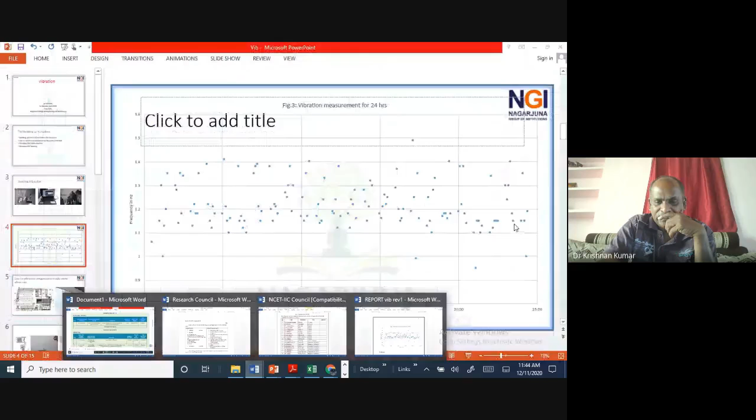So with this analysis, we gave the report to the concerned company people, those sitting in the US, and our report was very well taken. Finally they got clearance - nothing to worry about. So I'll be showing some reports on that.

Yeah, these are the reports. I don't want to show exactly whom we have done this for. These are the orders.

So what measurement methods did we use? We used a triaxial accelerometer affixed on the floor. The signals were captured on 3 axes using the NI-MyRio. LabVIEW 2017 was used for coding, for capturing the signal and for the analysis.

The captured signals were analyzed by FFT and the frequency was recorded. The recorded frequency in different spans were presented, and finally the 24-hour analysis report has been submitted. So here you are seeing our photographs.

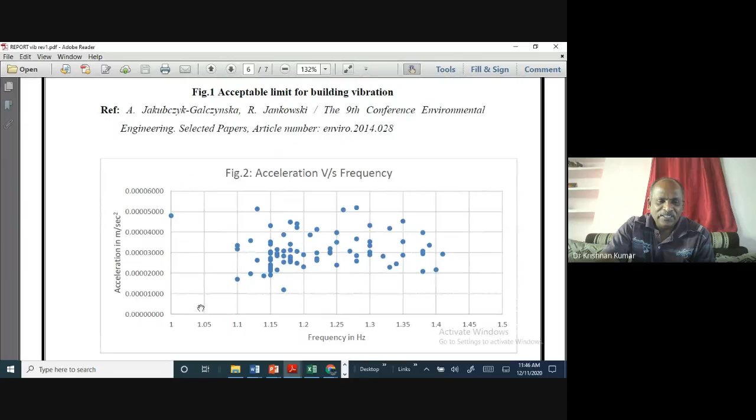This is within the limit. That is within the limit. You can see here, this is the one.

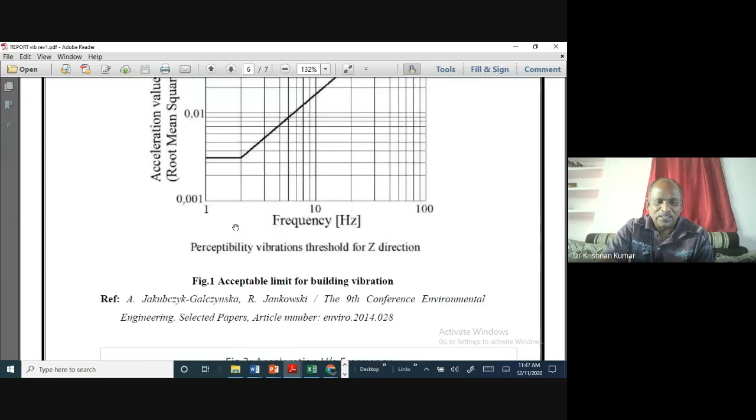0.00 and below, it is in the horizontal mode. Whatever frequency we have got is in horizontal mode. You can see that frequency also, between 1 and 2, is the horizontal mode. Right, this is horizontal mode.

So our frequency is also maximum 1 to 2. So whatever we have got is in horizontal mode, and this also satisfies - the frequency shall be greater than 1. Then acceleration also we have got this.

Next, the vibration measurement, the frequency with respect to time is measured, and this also proves that the frequency is greater than 1, and also all along it is uniform. So need not worry about it.

So 24 hours why we took is, suppose if any ramming is happening in between, that vibration may affect the building during that time - if any peaks are observed or not. For that purpose, we measured for 24 hours. But across all 24 hours, we come to understand that it may not be much of a problem.

And finally, we concluded and submitted the report. So that has shown that we can really do vibration analysis for any structures, buildings and machines. This is the one we have done for one particular tall building.

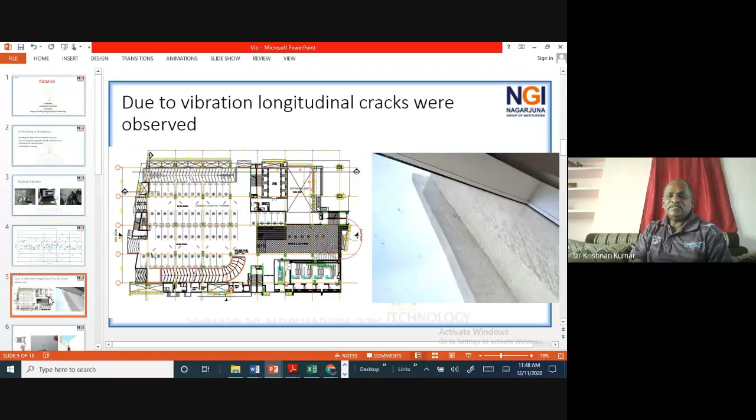Next one. There is a building that, due to vibration, has its face wall almost cracked and on the verge of collapsing.

This is also a very tall building, around 22 floors. You are seeing this is the face wall, and this is the perpendicular wall to which it is joined. Yeah, huge cracks from the bottom to top. We have seen the crack.

This is the plan of the portion. The encircled one is the face wall. The face wall is connected to the vertical wall, like that. And perpendicular to that they have the wall, and it is constructed like that.

Now that also was addressed to us, and we used vibration analysis. After that we found the cause of the cracking and we gave remedial measures, everything about what to do, and they have rehabilitated it. Now there is no problem of vibration over there.

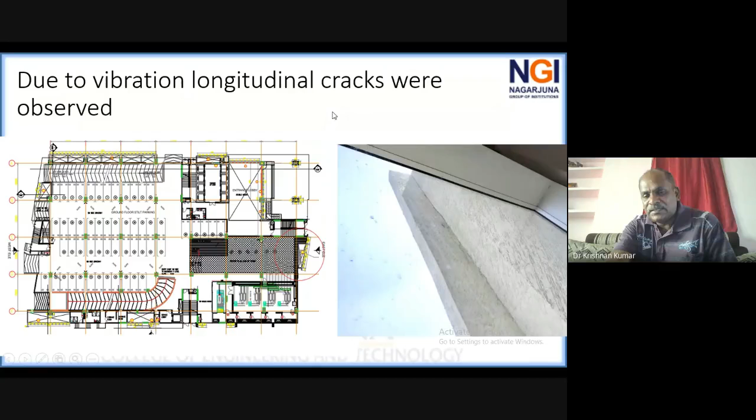You see the close-up view, this is the plan we have made. Location 1 and location 2. Location 2 is on the opposite side, this is location 1. We have a direct diagonal, and we have a vertical wall as well as the horizontal wall. So this is the close-up view.

The bottommost has got less crack, and as it goes up, you see that even a 3 centimeter crack width happened, because it is acting like a cantilever, and because of the vibration, this has got this kind of thing. Then what is the solution?

So we made measurements all along both walls here and here. Parallel to that, we placed the accelerometer at every 1 meter interval, and simultaneously with both accelerometers we measured the acceleration, that means the voltage response with respect to time.

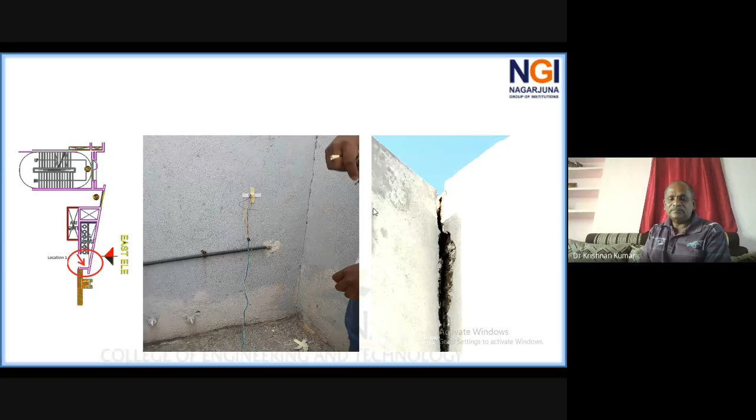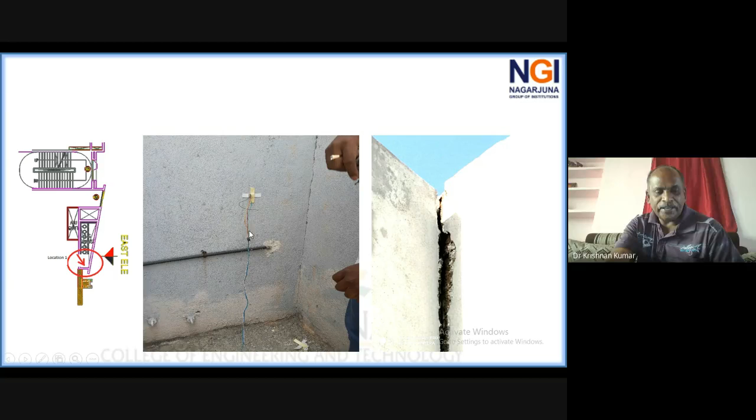After that, that is converted into FFT analysis. Through that we found what are the frequencies. Okay, this is the way we have done that job.

Okay, now how did we solve the same thing, and what method of measurements did we make? We used the triaxial accelerometer and affixed it on both the concrete walls at location 1 and location 2, and acceleration was measured with respect to the DG set on and off.

On the top floor, there were other machineries, the cooling machineries. For example, the entire building is air conditioned, so there will be motors used for cooling, that is compressors and so on. Also the water pump, the water tank is there, the water pumps and all, placed on the terrace.

From the well, it is taken up and distributed through pressure. That too is laid on the top floor. So we used triaxial accelerometers there on both the parallel walls. We kept it there, and this is the way we made it.

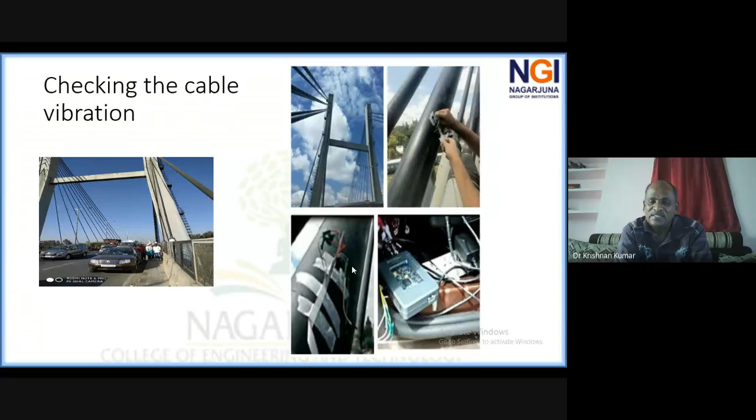My team students are there doing the work. On the right side you can see the accelerometers are properly affixed, and connected to myRIO, which was set up in my car's dickey. From that, we had UPS and everything set up, and we found the vibrations.

So the vibration analysis has been done there. You are seeing the bridge end, where the anchorage wires are ending, and the entire cable stay bridge rests on the bearing. This is the bearing, which I will explain to you later.

So in the bridges, these are the cable locations. This one is Bangalore side, another is Madras, that means Chennai road. This is the KR Puram road. So in the Bangalore side and Madras side, these are the cables. It starts from A, B, C, D, E, F, G, H, and M, N.

Finally, at the end, we have another 6 cables. So 4 plus 6, 10, the same way 4 plus 6, 10. Both sides 10, 10 cables. But only thing, the span is different. For example, first 4 cables, the same span. And it is made some eccentric, and they equalized with additional cables over there.

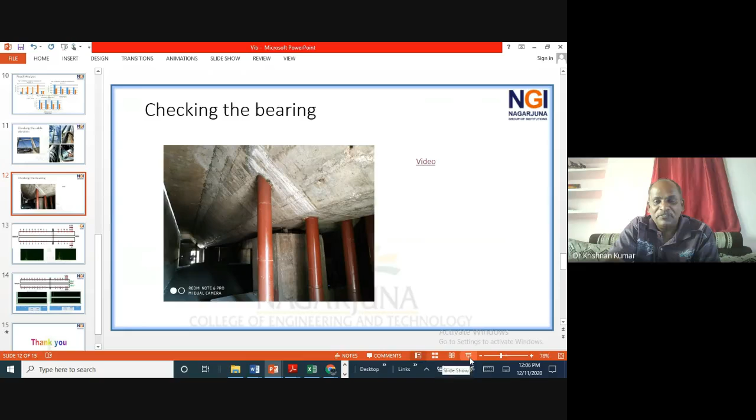So now, here are the bearings. This is bearing number 1 and bearing number 2. We have tested both the bearings. Before that, I'm giving you a small video. You can just observe that video. This is our team and our faculty members, exactly on the bearing.

Again, we have used the myRIO and LabVIEW 2017. The accelerometer is connected on the bearing. The bearing has two parts, lower part and upper part. The upper part is from the girder: the upper plate and lower plate. So the bearing is a movable one.

So here we have to make the vibration measurements both at the bottom as well as the top. That we have done. If the bearing is in good condition, both the vibrations will be almost the same. If the vibration movements are slightly different, it is also okay. But if the bearing is not good, there will be a difference of vibrations we can observe.

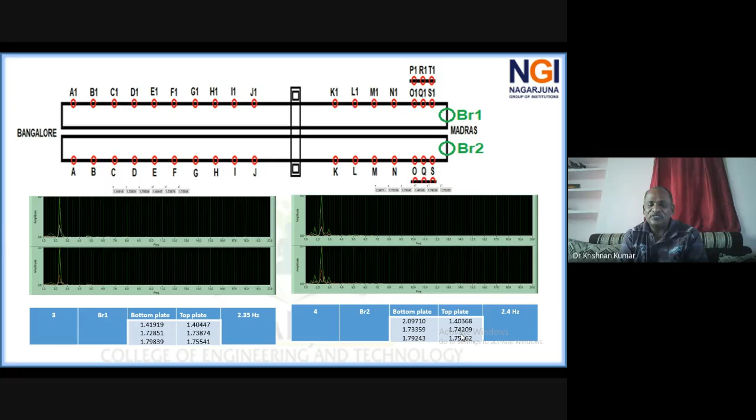So that also we have mentioned in the report, and we have given the report to the Southwestern Railway, and correspondingly they have worked out how to rectify it: we have to remove the bearing, clean it, properly lubricate it, and fit it again. That is the bearing maintenance they have to do. They have done that. Now it is working good.

So I want to show the reports. Just wait, please. Oh, sorry. I have given it in railways. I will show that report. It will be useful. That is in railway.

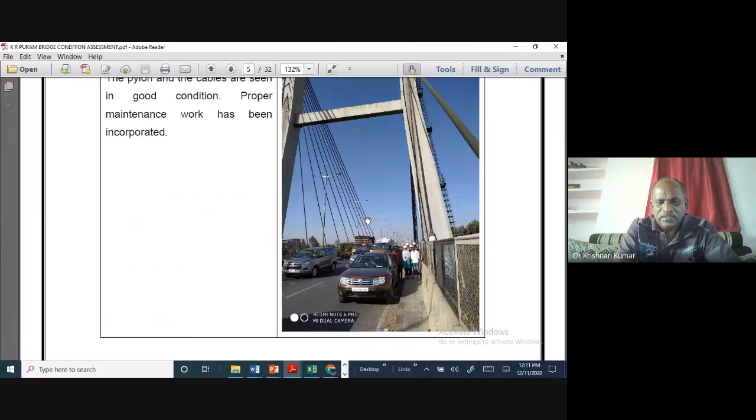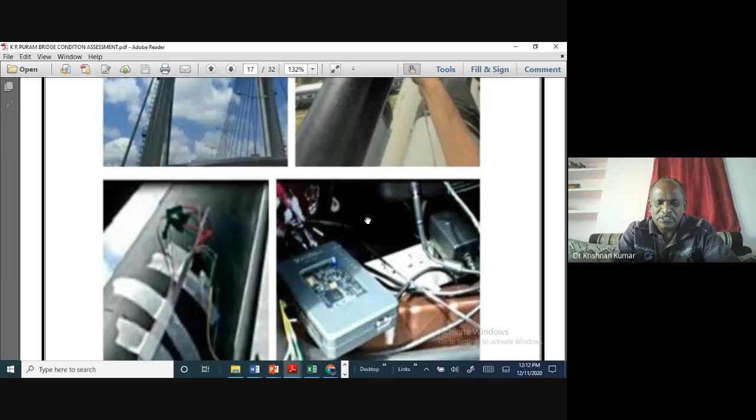So this is the condition assessment of the cable-stayed bridge which we have done, in March 2019. These are the letters they have given. This is our team. And these are the components at different locations. The vibrational analysis which we have done, these are the vibration measurements. That is the close-up view.

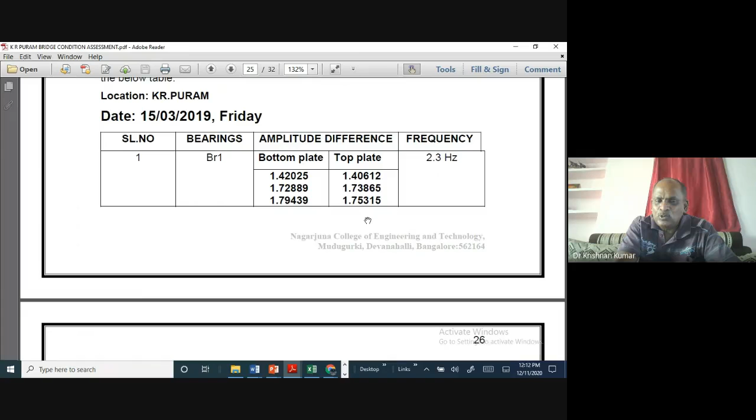And these are the different vibrations for all the cables. We have done FFT analysis. And the bearing also, these are the bearing readings. The frequency is 2.3, with different amplitudes. These are the frequencies we have given, and finally we have submitted this. This was very useful for them, and they now properly have the monitoring system.

They are frequently asking us to complete this work. This year, because of the pandemic, we are not able to go. Next year, 2021, we are planning to do the same kind of job. So then I will be giving you certain LabVIEW codings with regard to vibration.

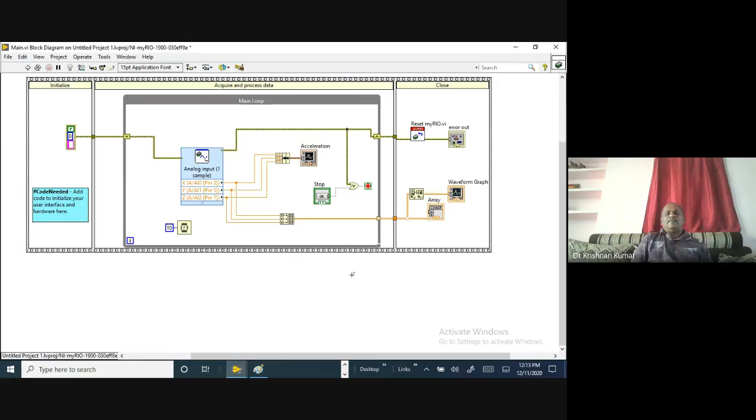You see that this is the vibration project. When you make a standalone system in real time to make a measurement, this is called a project. We have to create a project. This will be automatically created when you connect the myRIO with your system, and it will configure automatically. When you open the project, it will show the main VI. In that VI you have to do your coding for acquiring the signal as well as for further analysis.

So this is called a project. In any real-time work, we have to do it this way, in this project mode. Then after that, in the same main VI, for example, I'm just closing this. Here also I'm closing this. I wanted to open this main VI. Now I have got it.

You see that the project structure is like this. The state machine which we have seen is for different use, but the project is like a sequence structure. Inside you will be having a while loop. Initially the sequence structure is to initiate the error handling. Initially it is 0. Then we have used a shift register here.

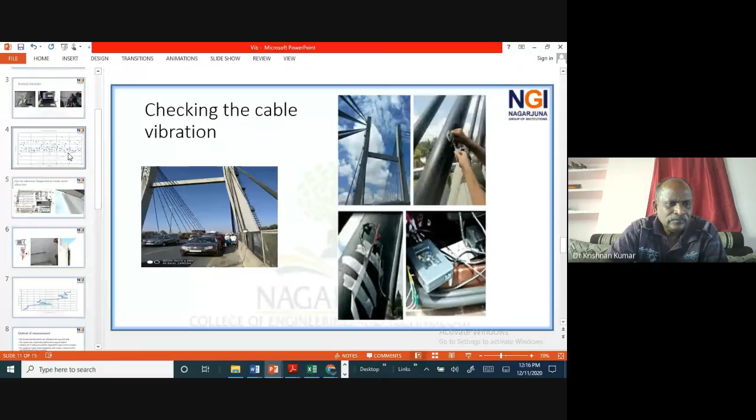You are seeing here the accelerometer is here, correct? In the accelerometer, on this side, is the general configuration of myRIO. So this is the data connection and power connection. And here, this is like a DAC, we can use it. And one more thing, we have input and output for voice recording. And on this side we have A and B, all channels we can use. So for A, analog input channels and analog output channels are available, and for B also we have analog input channel

and analog output channel. Right now, what we have done is for A, the A compartment, in which we have used the channels. So that is the one I told you there. Okay, so this comes under the A channel, AI0, AI1, AI2. So this is AI0, AI1, AI2. In LabVIEW it always starts from 0, not from 1. 1 means the second channel, 0 means the first channel. Like that it will be there. So here A compartment AI0, and A compartment AI1, AI2, like that. Okay, that is X, Y, Z.

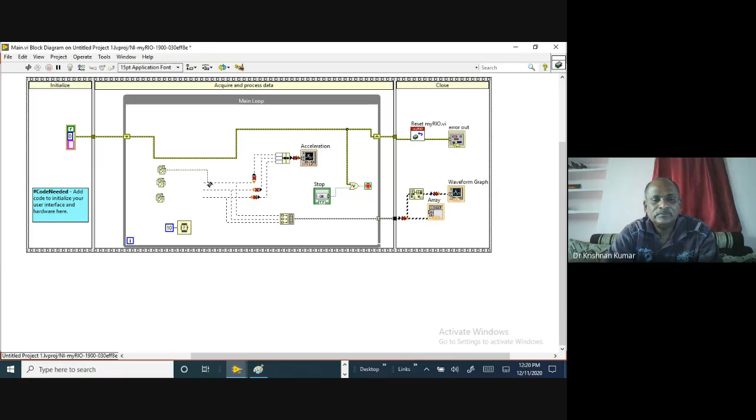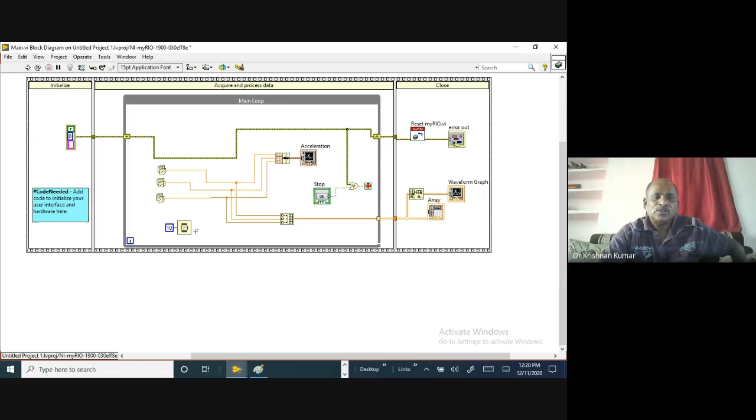So this is actually with the equipment. Now I am going to simulate for you. Okay, now I am taking it out. So I will be simulating. Okay, so what I am going to do, I will be giving you some random numbers. So these random numbers I am just connecting. So the wait time we have given is 10 milliseconds. Okay, 10 milliseconds we have given as the wait value. So now let us see how our simulated acceleration we are getting.

I'm sorry, the equipment should be there, then only it will be coming. But what I can do, I can directly make the same thing without the project. Okay. So I'm closing the project.

So I can use a sequence. So this is a sequence structure. Add frame after. Again I can add after. So this is the typical block diagram. Okay. So here we will be initiating and it will be closing. That will be there. And here what I can do, I have to use my while loop. So I am using my while loop here.

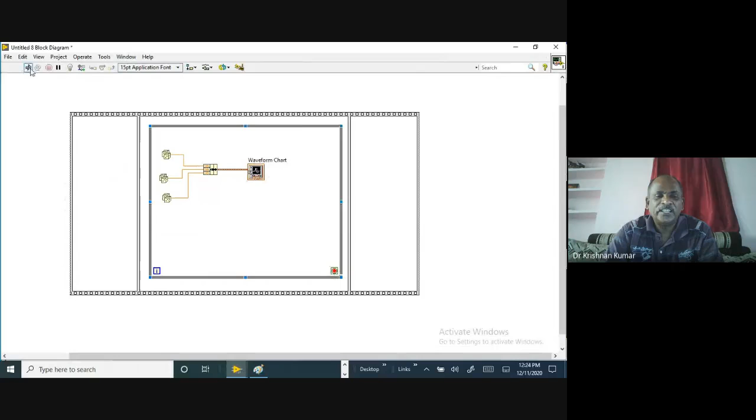So this is the one waveform chart. So I'm connecting to the waveform chart. So now it is still in gray color; your coding is not fulfilled. That means here we have to give a condition. So I am making a condition of stop button. Now it has become white.

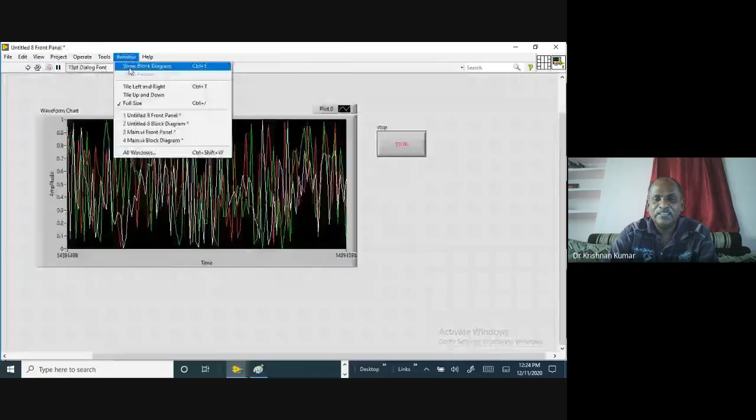Otherwise the while loop will continuously operate. Whenever we want, we have to turn it off. In an emergency you can also turn it off here, but I'm not doing that. So now I can run the system. Before that, I will stop. I wanted the wait time every 10 milliseconds. So I'll be giving every 10 milliseconds. So 10.

Now I will be getting, yeah. So you can see that the waveform is coming. The same way you will get the complete X, Y, Z direction accelerometer readings. After that, this reading can be utilized for making the analysis.

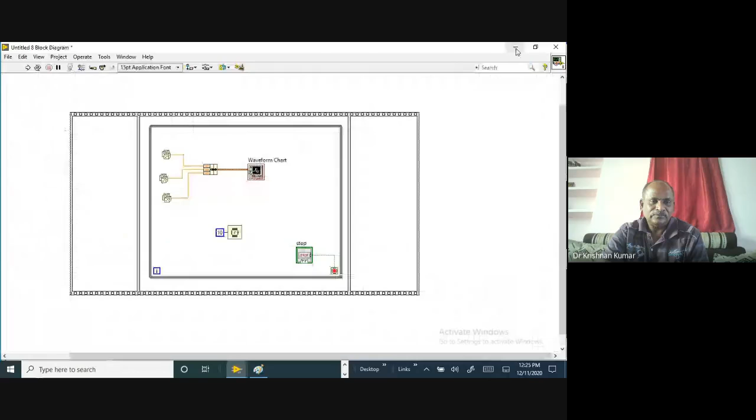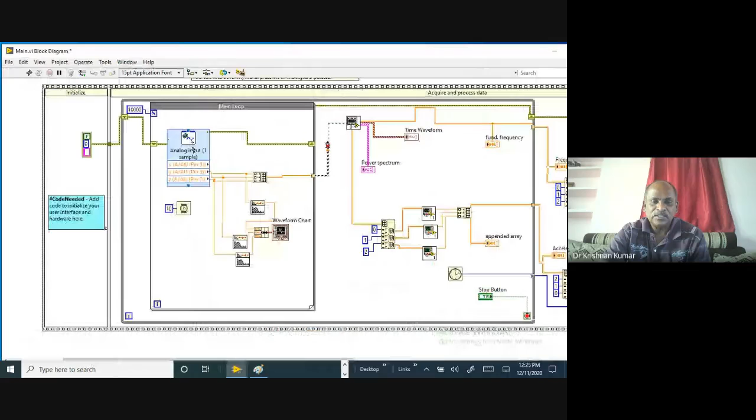So for that, I will be giving another VI. For example, this VI you are seeing here. So the same thing from the equipment, now it is filtered. Let's see which filter it comes under. This is an equiripple low pass filter, point by point. That will filter the noise and you will be getting only the signal. That signal you will be taking as the accelerometer reading.

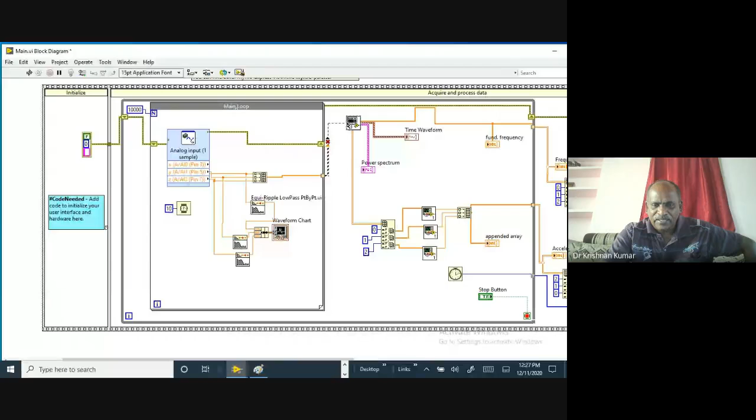See, for example, this is the file path which is connected there. This is the sub VI actually. So here is the sub VI. Correspondingly, whatever output is coming, it is coming to the file path. So now, for example, instead of the file path, I can directly give the value here. So this is this particular thing.

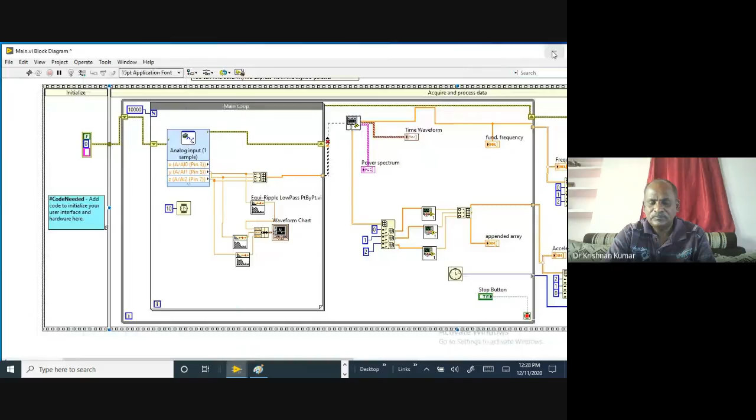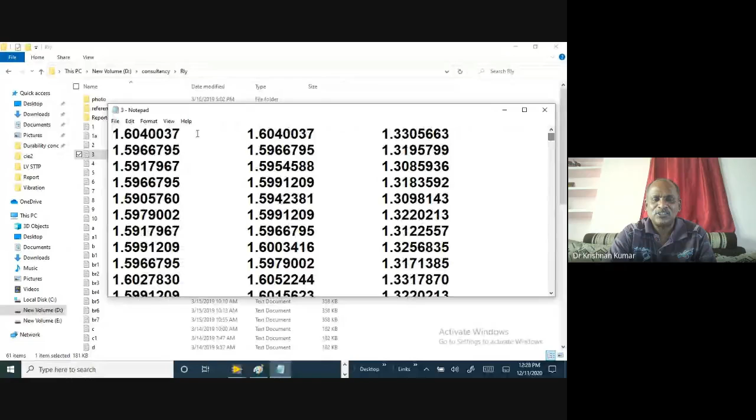Suppose you have an accelerometer reading; it will take up the data, and after that it is going to analyze. So in real time I will show you some of the data. In the cable bridge itself, we have got all the data. These are the cable numbers. For example, cable number 3. These are the accelerometer data, X, Y, Z, the 3 different accelerometer readings in terms of volts. This will be captured there.

So in that particular VI, I have to open it. For demo purposes I am opening it. But actually, if it is a sub VI, that will automatically be taken from the main VI. So now I want to use exactly the data from that railway consultancy. Suppose cable number 3 or 4, whatever it may be; let us take cable number 6. Now it is done. If you click the run button, then you will get it.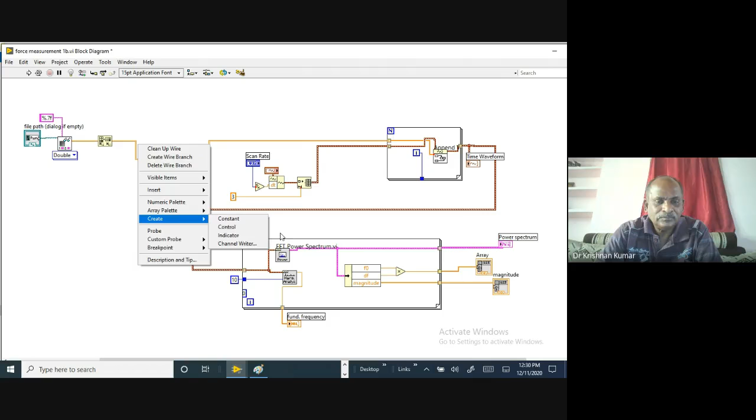I'm just checking here. I think data is not there in that particular one. I will go to another. 3.

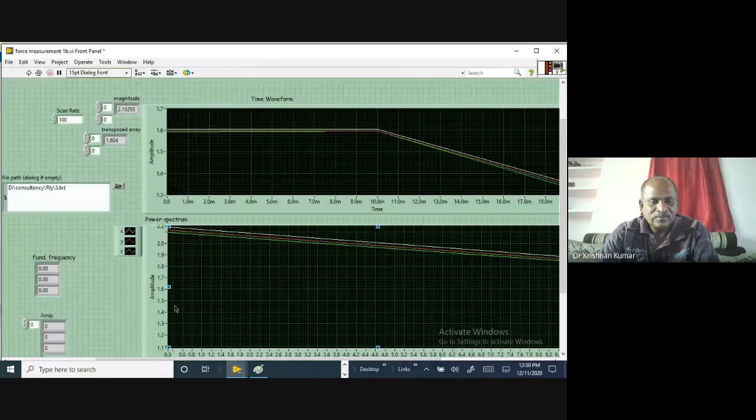You are seeing that now. In cable number 3, we have the accelerometer data. Now you are getting the fundamental frequency. The frequency is 2.15 or something. This is the FFT analysis. See how the FFT analysis is done. So now this is the data from the accelerometer.

Then the accelerometer data is segregated into a 2D array. In the 2D array, for each axis there is one array of data. So that we are segregating here. We are splitting the data and taking each separately. After that, I am making it cumulative here; each one I am going to append.

So here the scan rate is given. Generally I use either 50 or 100 scan rate. Generally I am using 50 and we get good results. There are 3 channels, that's why 3 length of data is going over there. These 2 things are appended and we will be getting the time waveform.

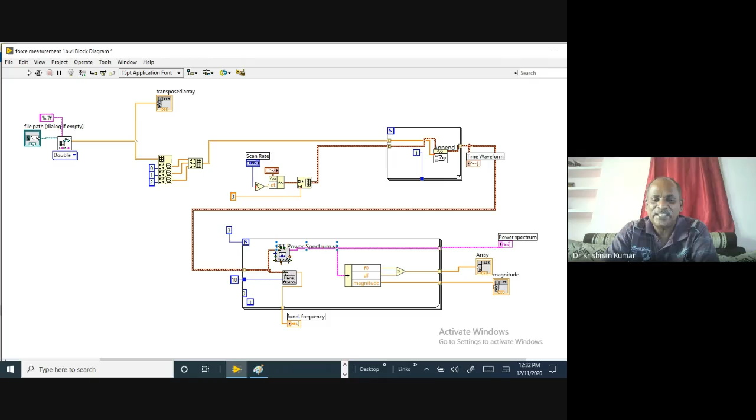So further, the waveform is given to the Fourier transform and fast Fourier transform power spectrum. So here you will be getting the power spectrum diagram. Okay, and further you can also take out the fundamental frequency and magnitude; everything we can calculate from here. So we have found the fundamental frequencies here, right? So this is the maximum fundamental frequency in all x, y and z axes. So this is the way the vibration analysis of all the cables has been properly made.